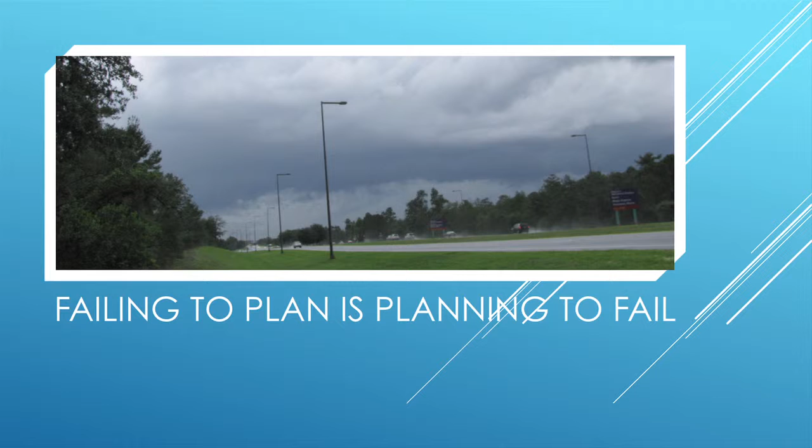I hope I give you some information that makes sense, but a lot of this is kind of intuitive, and I hope it makes sense for you. So remember this kind of phrase: failing to plan is planning to fail. If you hope it doesn't rain, if you don't want to worry about the rain, 9 times out of 10, nature is going to hit you upside the head with a big baseball bat full of rain.

So just some kind of things to drive home that point. Do it now, thank yourself later. Procrastination is like credit cards, a lot of fun until you get the bill. And the last one, a man who procrastinates in his choosing will inevitably have his choice made for him by circumstance. So if you don't plan for it, the weather will make that decision for you.

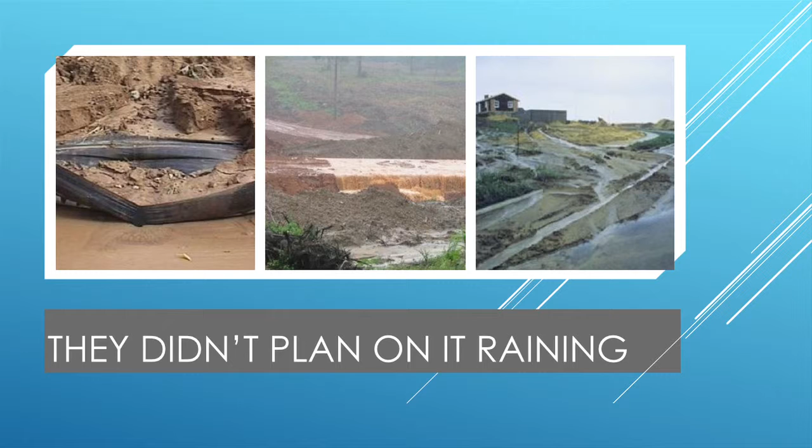These are some pictures of people who didn't think it was going to rain while they were out there doing their project. Well, of course it does. And they have control failures. They didn't think it would rain here. All across the country, we didn't think it would rain. In some instances, it can be pretty severe.

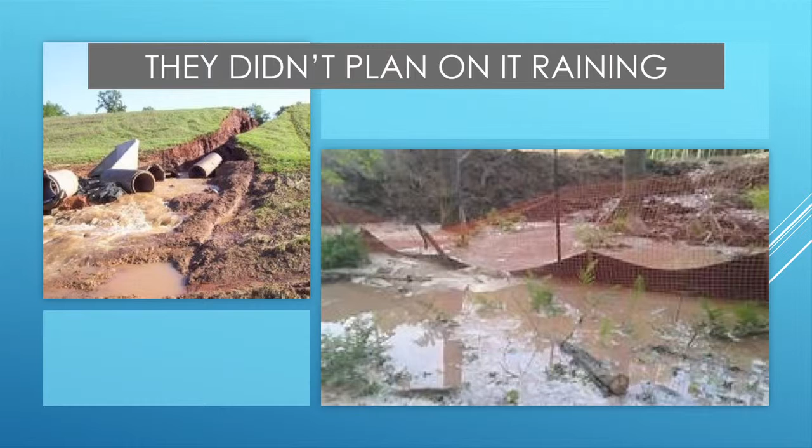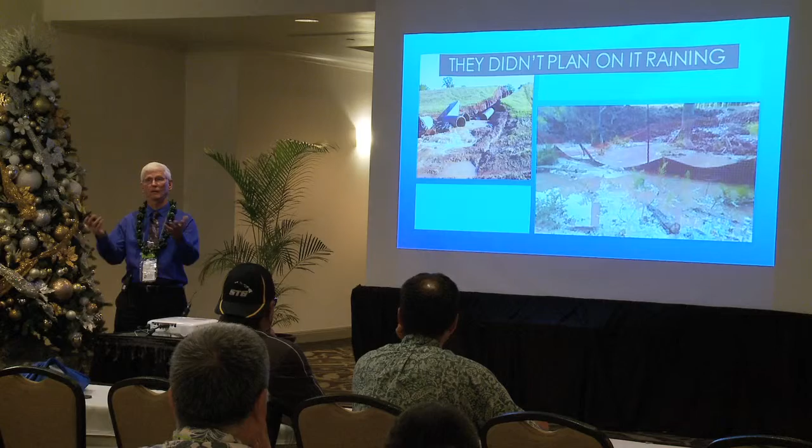We just installed our stormwater pipes, put them together, compacted them into the ground. It rained enough to cause them to separate and come back out. Now we're going to have some serious repairs. Basically, we get to do it again.

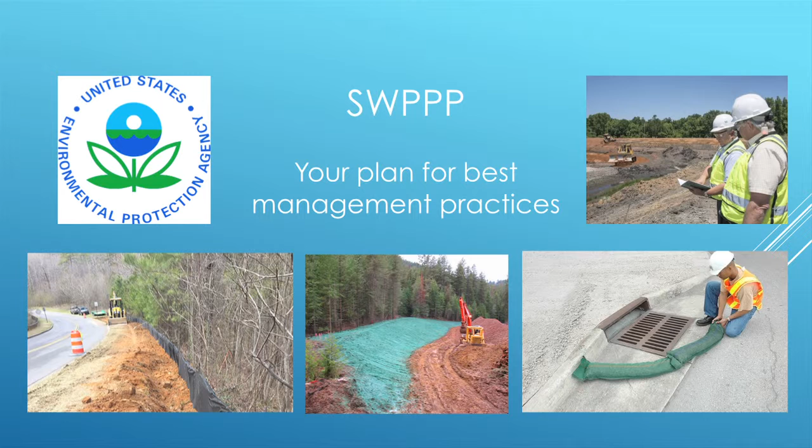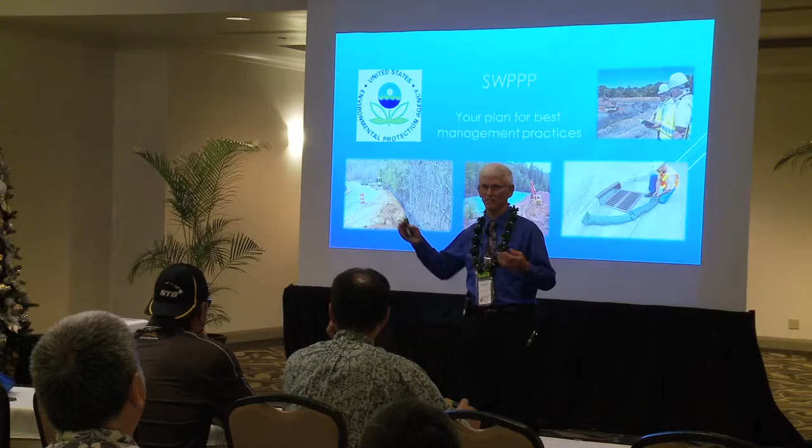Your stormwater pollution prevention plan is your best plan, your guide on how you're going to address this. Remember, a SWPPP is meant for you to make changes on. It's designed for you to make changes. When somebody applied for the permit for your SWPPP, they were guessing 3 months, 6 months, a year ago on what the weather would be. If they are accurate, let me have their name, because I'd like to make a lot of money on them predicting the weather. But they're usually not accurate.

Ideally, everybody would like to do most of their work when it's not raining. It's easier. Nothing's going to wash off, right? But now we're seeing unpredictable weather patterns. I'm from Florida. We're getting 2-inch, 4-inch, 6-inch, 8 inches of rain in one thunderstorm. That's more than you get in a month here. It's a lot. You're getting the same amount of rain you get per year, but you're getting it all at once. That's only going to continue to happen. So you better plan on it raining.

You should be able to survive what is a normal rainfall amount for your site. And I think I looked it up. A normal rainfall amount for Hawaii is less than a 1/4 inch of rain. However, if you have tropical storms and things blowing around, that can go up 10 times, 100 times more than that, especially if it sits out there and just funnels rain in on top of you. But you all should be able to survive a normal rain event.

When I was working at Disney and the Reedy Creek Improvement District, we couldn't do that initially back in the 80s. Sometimes we did, sometimes we didn't, but we had to learn to build things up. We had to learn that always on the low spot where the water flows, that's where we need most of our protection. You don't need it on top of the hill. You need it on the low spot. I don't need it necessarily next to where it might flow across a parking lot. I need it where it might flow into the wetlands or in the creek. That's what needs protection, or the water reservoir. Those are just things that make sense after a while.

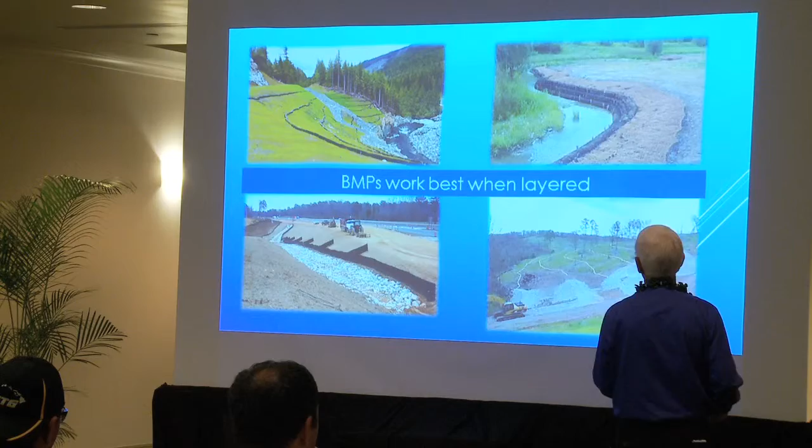Layers of BMPs work. Layers of BMPs. Having perimeter controls, having things that slow down the flow, having things that can divert water. These all work. Can't get over there.

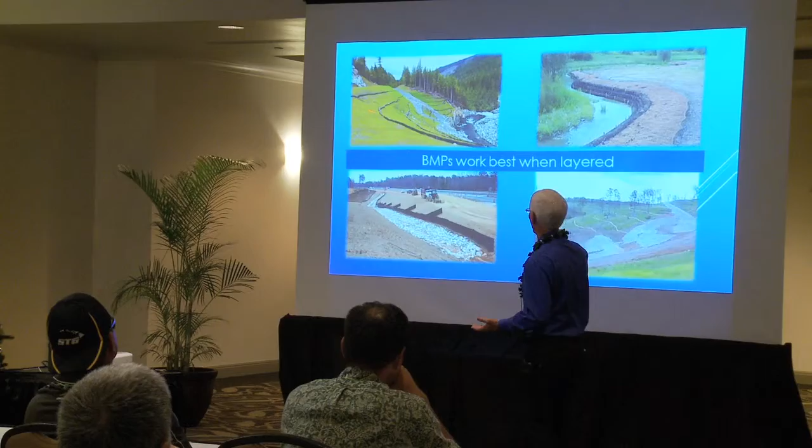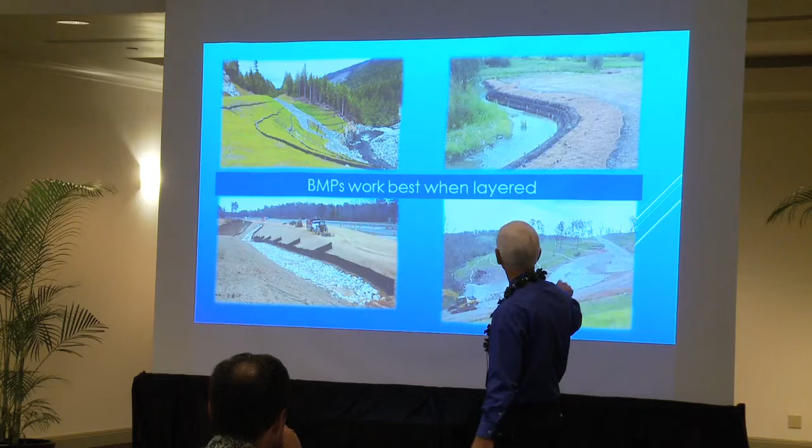You can see this on the hillside. They have their grass established. They have their channel beefed up before it goes down into the creek. Here they're trapping sediment as the flow's coming off of the road, going down into the beefed up channel. Same thing here. Here they beefed up the edge of the channel with some coconut.

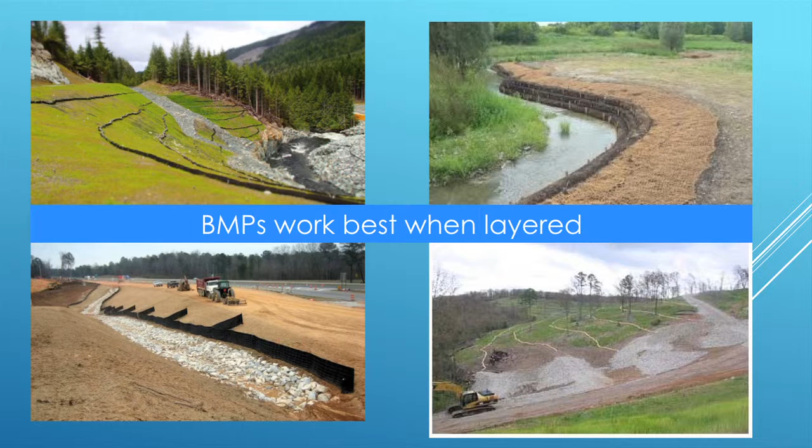All these different things. And this didn't happen overnight. They didn't just go out there and do that. It took them a while to learn to do this. Understand the difference between sediment controls and erosion controls. We always call everything erosion control, but there is actually a difference.

Sediment controls are measures we put in place while we're still pushing the soil around, while it can still flow off-site. They're the things we see a lot: the silt fences, the floating turbidity curtains, the inlet protection devices, and check dams. Those are sediment controls because water still has a chance to move the soil around.

These cost you money and time. You have to maintain them. You have to clean the sediment out. This is where all your effort is. Go look at your inspections. Silt fence failed, wattle failed, check dam had to be cleaned out, inlet protection failed. That's where you're spending your time and your money. That's where you want to make changes.

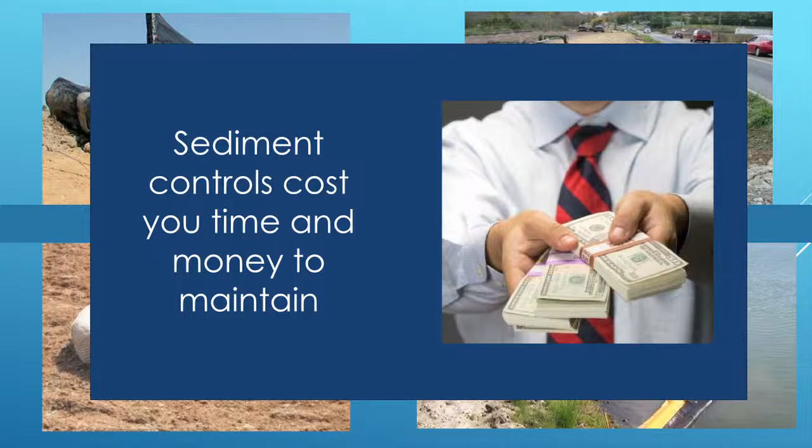So how do you get to that? Well, as quick as you can, you want to go from sediment control to erosion control. Erosion control is our permanent stabilization, usually some type of vegetation or a rolled erosion control product. Hydroseeding, hydromulching, those are excellent tools. Even the riprap we put down, sometimes with the rolled erosion control products.

We're done. You put that down right. Are you going to do any more maintenance on it? No, you're done. Unless something causes it to fail, you're done. So as fast as you can, you want to go from these controls to this control.

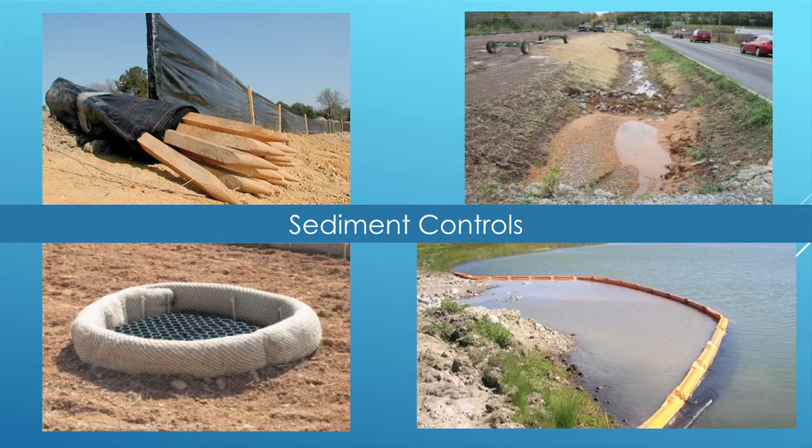Now, you can't do that overnight. This is kind of a silly question. How do you eat an elephant? One bite at a time, right? So how do you stabilize your site? One piece at a time. You get this graded, get your cover down. Get this graded, get your cover down.

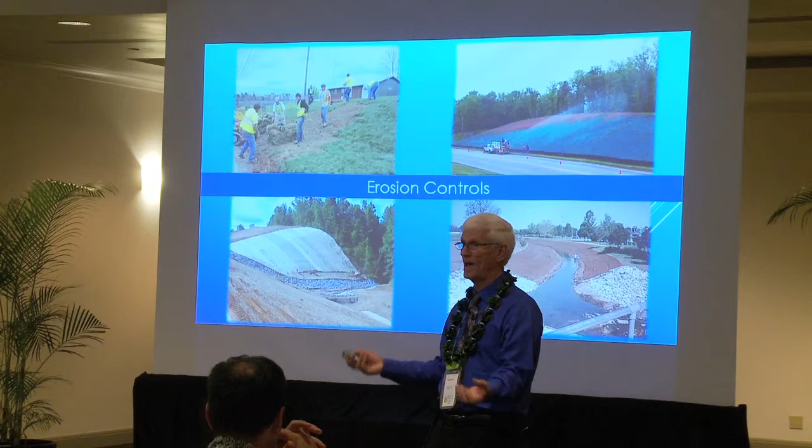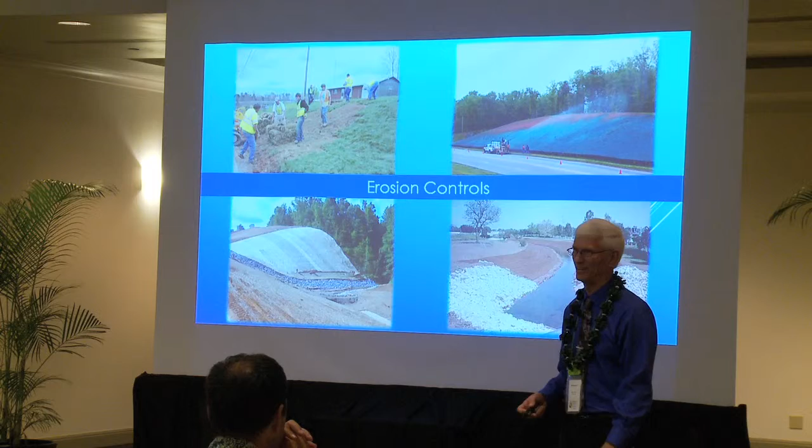Don't wait till the whole thing's graded and then put your vegetation down. You're asking for trouble. If you get it graded in sequences and phases, when the water comes off, it's clean water and you won't have as much to deal with. It took me a long time to figure that out. I had to learn it the hard way. Had a lot of failure. I am a failure when it comes to BMPs. I have failed on many BMPs before I had success.

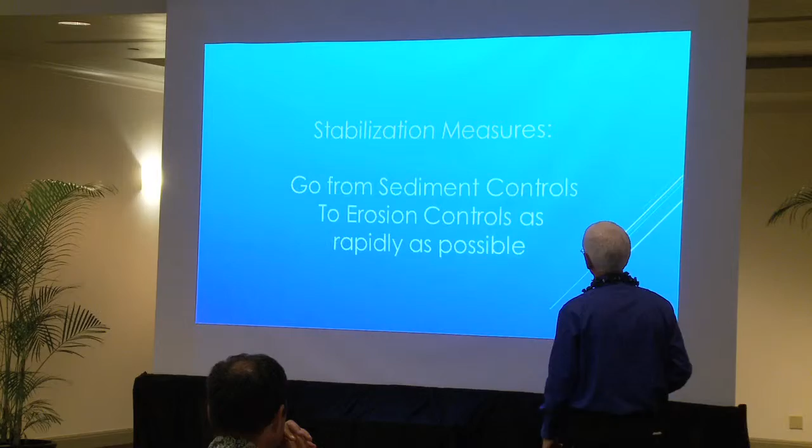How do you prepare? Let's say the forecast is for 3 or 4 days of rain. What can you do to get ready in a short amount of time? Well, you can't go stabilize the whole site in 3 or 4 days. You're out there on it. So what are some things you can do?

Well, again, in last-minute preparations, we want to know the accuracy of the weather forecast. Some weather forecasts, it's going to rain, and then nothing. Or it doesn't look like it's going to be much rain, and then the heavens open up. So get accurate weather. Walk on your site. See how it looks. Don't just look at the map, look at the SWPPP. Actually go out there and see what it is.

Most of the time there's a 5 to 7 day lag between what's actually happening on your site and what the documentation says. You have a week to get it caught up anyway. Know how water enters and leaves your site. That sounds basic as anything, but most people can't do that. Most people who are really good at designing CAD drawings couldn't go out to a site and tell you which way the water flows.

Now, at the beginning, the water starts out in one direction. At the end, it may go the opposite. And while we're in between, it's going off in all directions because you're regrading subbasin A and subbasin B, and different parts are going to different areas. That's when it's difficult to figure out where the water's going.

Reinforce any weaknesses in your fortress. If your controls are already run over by the equipment, or they're not installed right, or they look kind of flimsy, time to beef them up, right? A storm's coming. Beef it up. Have repair materials available. Silt fence doesn't go bad if it sits in your storage shed. You can use it on the next project.

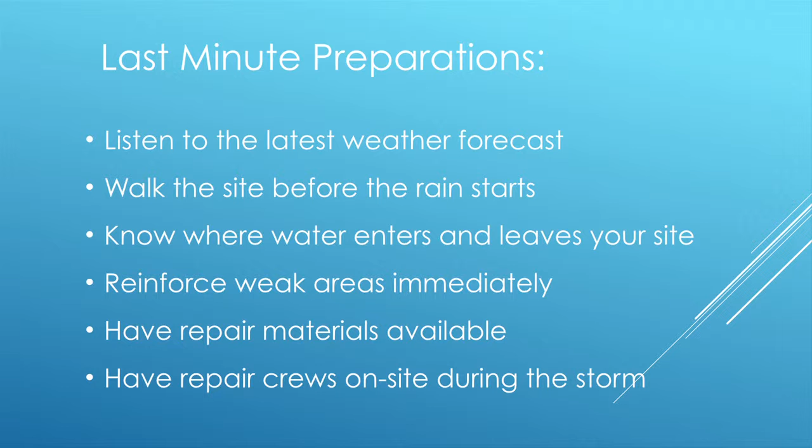They can do something. We can look at all of our areas that we look at, our perimeters, our inlets. What are we doing for slope stabilization, stockpiles, flow channels, other things we can look at. We can add an extra row of that perimeter. Like I said, beef up the low spot. Add another row of your perimeter control.

We can divert the water. We can put down our erosion blankets. Those are another thing to have on stock. Rolling those out real quick with a good crew, you can cover an area the size of this room in half an hour to an hour. That can help. That can be critical.

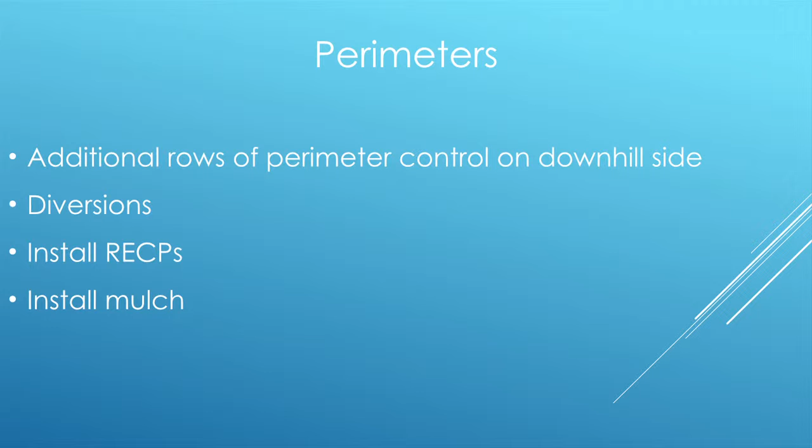Mulch. In Florida, after we have hurricanes, we have trees down everywhere. Well, we grind it all up into mulch. There's free mulch. If it's not going to float, mulch protects that bare soil from that raindrop. It'll get you through that rain event. If you have some of that, that could be useful. And again, just some pictures to illustrate what I'm saying.

There's a second row of silt fence. Here we've got our wattles. There's some diversion channels. They've added a row of erosion control blankets to their perimeter. Here they're blowing mulch. If you use a hay mulch or something like that, you want to make sure that you crimp it in. If you just blow it out on the surface, the wind will blow it down to the low spot or the rain will wash it down. You have to go in and take like a disc, just run over it. It'll push it in about an inch or two. That makes a difference as well.

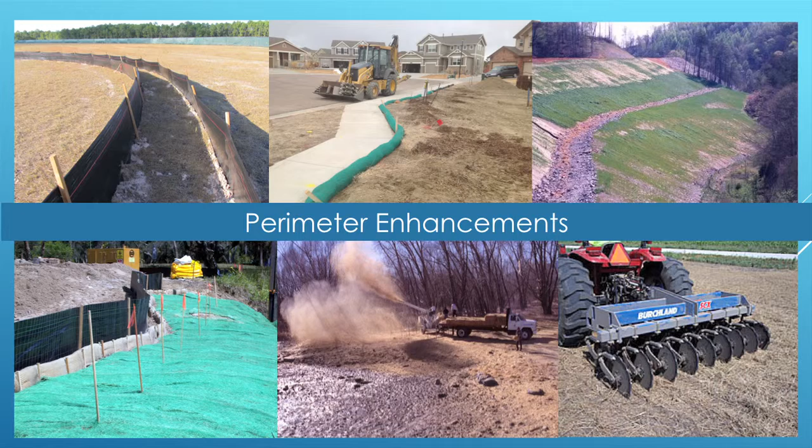Again, for our perimeters, just things we can do. We can interrupt the flow of water. We can stabilize upstream. Let's say if you know a hydromulch company, they can be your best friend just before the rain comes. Maybe you've got a 50-acre site. They can't stabilize all of it. They can start at your perimeters and start giving you some extra protection right around that. Within an hour, you can have your site beefed up. After the rain event, you can get back and regrade it and do whatever you have to do, but it can get you through that.

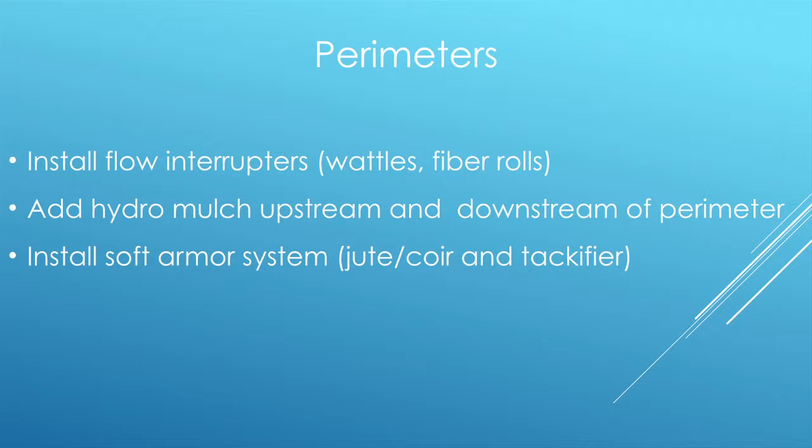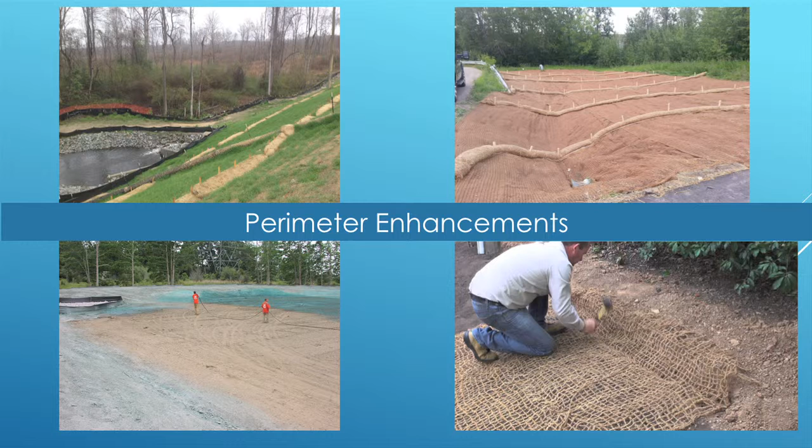If you have jute from a landscape company, pieces of jute can help you in some instances. Again, there's that going on there. They installed coconut fiber matting with wattles there. Here's a hydromulch company coming in and stabilizing around the area. Again, these are real quick. I pick up the phone, call Joe or Steve, and he's out there in an hour getting it going.

Inlets. Inlets are challenging. Inlets are where sometimes we can't do anything. There's so much flow coming through, or sometimes what we have doesn't work. Inlets have a lot more choices. When I started, your choice for inlet protection was rocks and silt fence. That was it. Now you have engineered solutions. Now you have types of wattle materials or mulch socks, things like that.

Always make sure that the inlet has the ability to let the water overflow. If the inlet protection device sucks up to the curb, it will cause flooding. Even if you have that, you can fix that though. I'll show you that. You can add a little extra control around it, and again, too much water, send some of it in another direction.

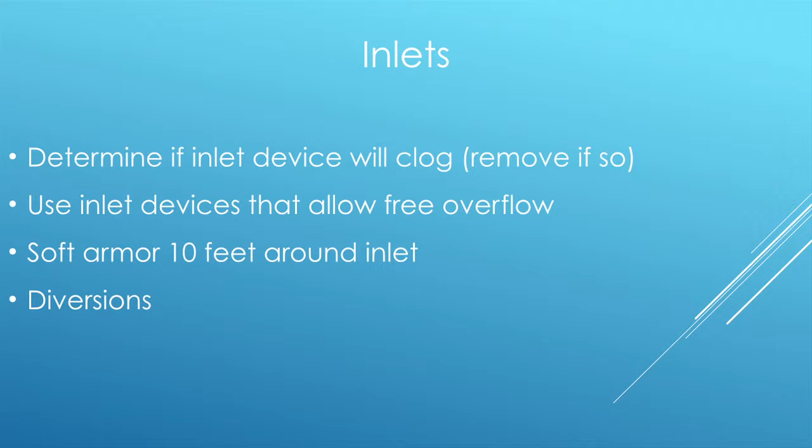This is in Florida. A lot of times people like to use these drain field pipes. Let me see if I can get over here again. Problem with this is you'll see this goes right up in the curb inlet, and if you have a rain event, it will suction right up into it, and it'll cause flooding. So to fix that, what you can do is pull it out a little bit and put a sandbag in between it or half a concrete block that will allow overflow.

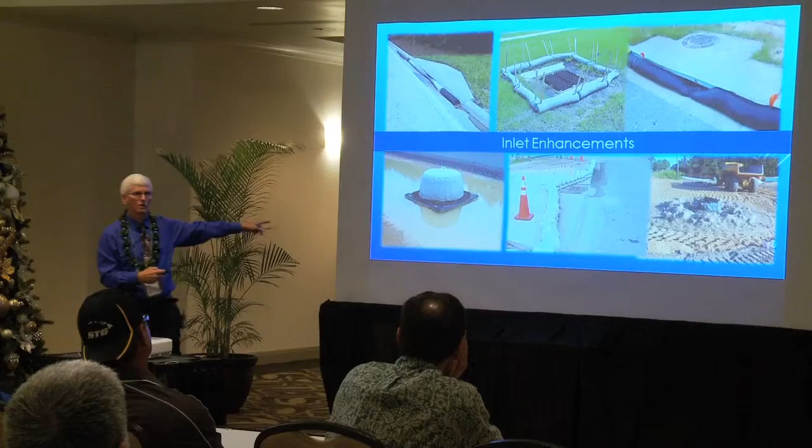This is geohay, artificial hay bale. This allows overflow coming into the inlet. This is recycled tires in a geotextile called a gutter eel. But notice it has a pinched waist, so it allows overflow. This is a product called Silt Saver. It's a high-density polyethylene skeleton with a bag over it. It allows the water to flow through the sides, and it has an overflow port.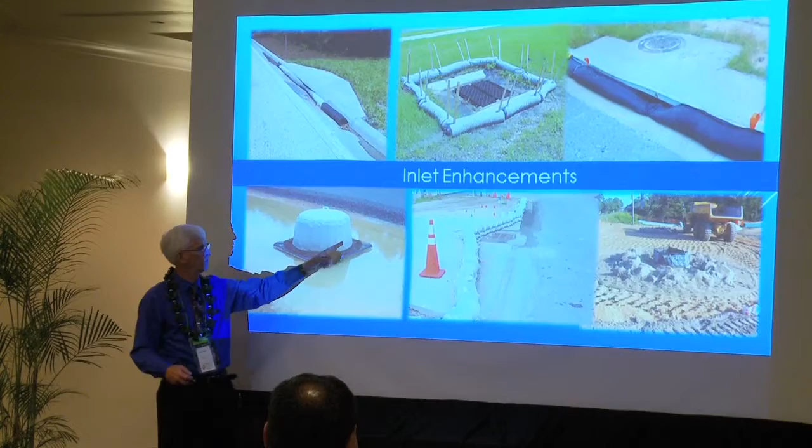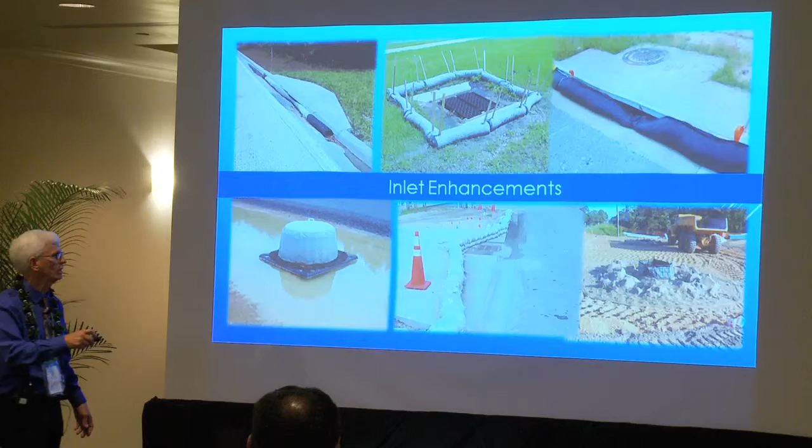Here somebody's used rock bags to allow water to get to the inlet and not go to their site. And here they've beefed it up with a little bit of jute around a silt fence inlet protection device. But again, don't have anything that suctions up to the inlet. That will cause flooding. This is good for overflow. That's good for overflow. You want overflow. If you can't get overflow, you'll have to pull your protections. It'll cause flooding. We can't have flooding, right? We can't have flooding.

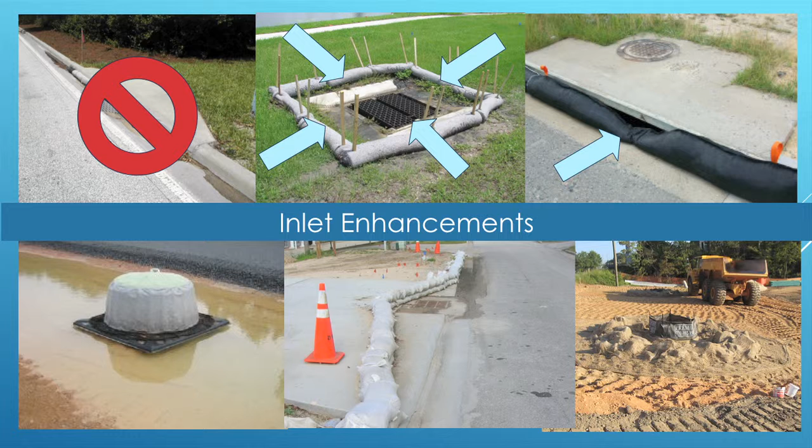On slopes, we have different choices. We can protect the slope both temporarily and permanently with hydromulch. We can do our erosion blankets. RECPs is just the technical term for rolled erosion control products. You've seen erosion blankets. Jute again. And again, we can divert the water, get it flowing different directions.

Again, I like hydromulch. Hydromulch is instant. I used it one time to stabilize around a pond, very steep slope. An hour later, it rained 2 inches, and I thought, oh, there goes all my money washing into the lake, right? It didn't move. I was impressed. So once this is properly applied and gets out there, it'll survive quite a bit of rain and keep you from having to chase mud.

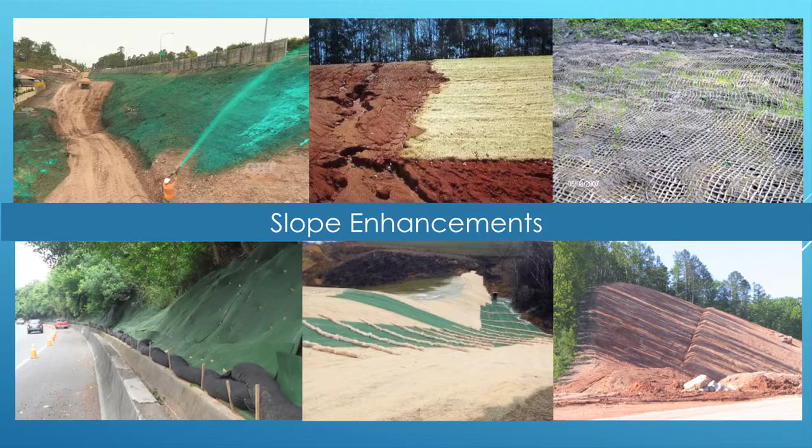You don't want to be chasing mud. That's a waste of your time. Not even counting any violations or rules or anything. You'll have to go get some more soil to put back on the slope. It's a waste of your time to go do that.

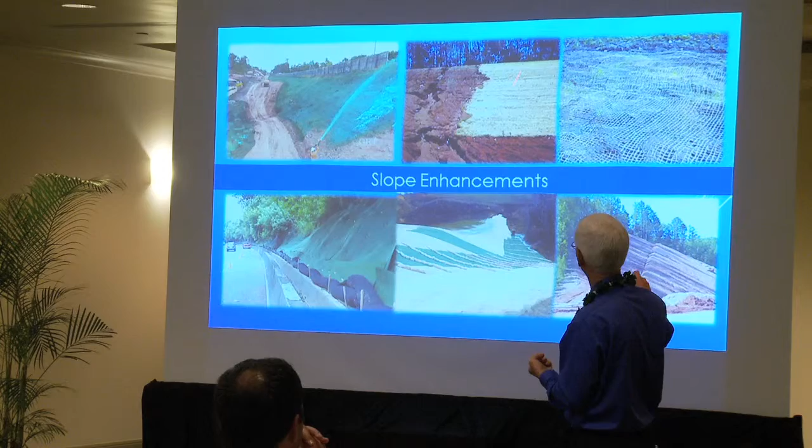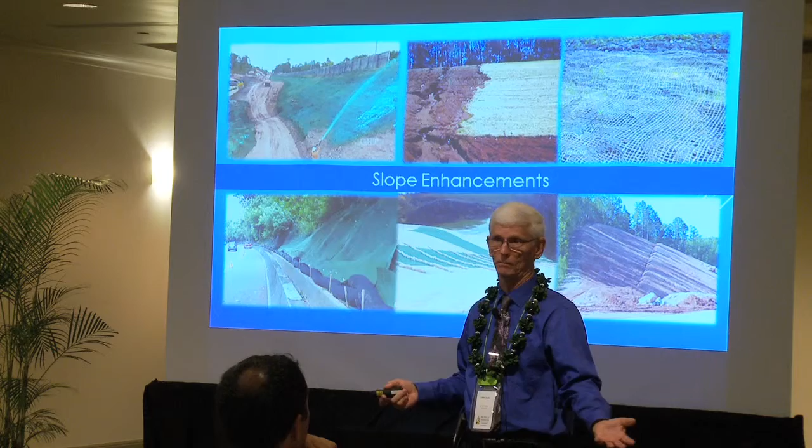Here's a good example of a rolled erosion control product. Protected, unprotected. You can see unprotected, we're down to gully erosion. That's all washing off. Somebody's going to have to bring that back up and regrade it. Here you can see some of the grass starting to grow up through the jute. That's a good thing. This is actually in Hawaii. I believe it was a project done recently along one of your highways.

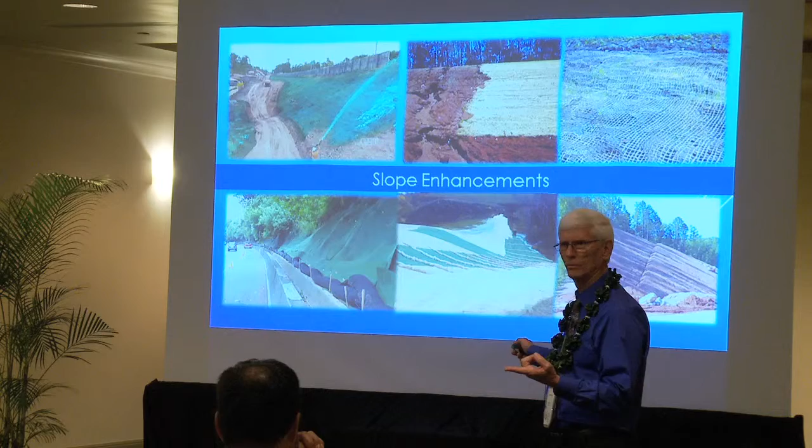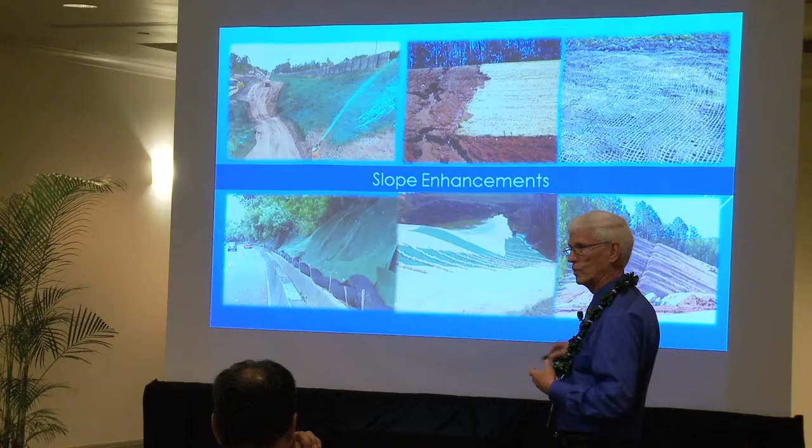Here's a very steep slope with erosion blankets and wattles acting as check dams. Here's a diversion so that the water doesn't get a full run off the slope. Hopefully most of this is review. It's not anything new. You've seen this. It's just a matter of putting it together and making change, being willing to take a chance and make changes.

Soil stockpiles. I saw some good examples in some of the pictures before we started this morning. Again, you can hydromulch them, you can put blankets, you can soft armor them, perimeters, you can cover it with a tarp if it's not too big. Okay? Or you can make it go away for the rain event. If it's small enough, take it away.

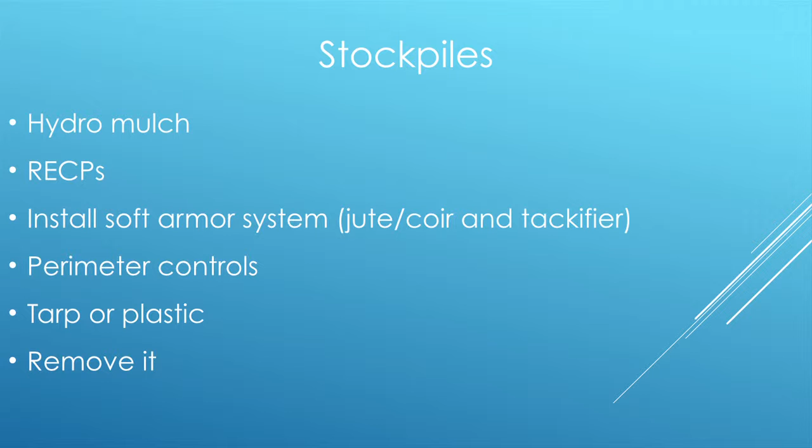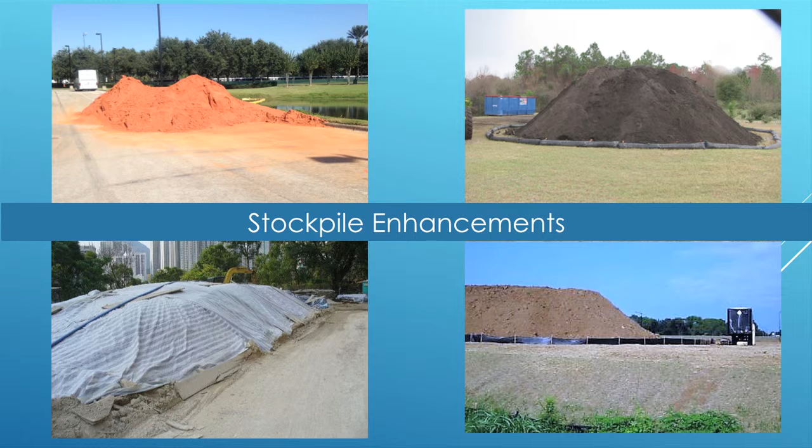Unprotected soil stockpile next to an inlet, we don't want that. You know where that's going to end up, in the water there. Here it's protected with those gutter eels. Those things weigh 84 pounds apiece. They're not going anywhere. Okay? Here they've got it covered with some plastic, and here they've perimetered it with some silt fence.

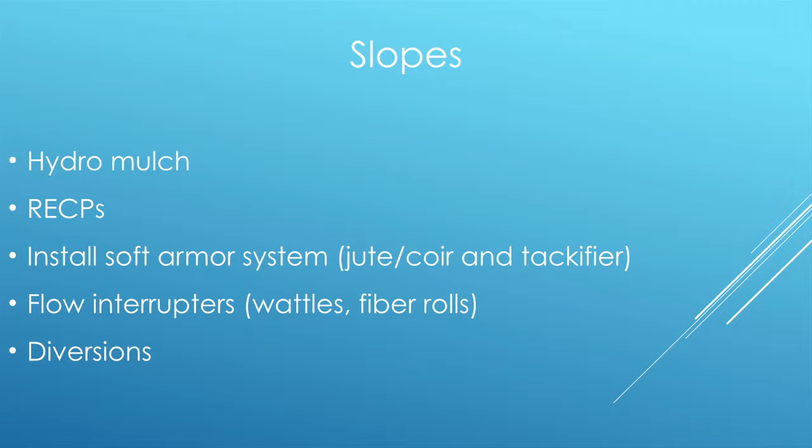Slopes, we're going to talk about all these as slopes. Again, we're going to be hydromulching, doing the same thing. Let's talk about a material that I used and we use in Florida, but it's not common here, that you all should look into and get approvals. There's a material called anionic polyacrylamide, or PAM. There's several types of PAM. You always want to use the anionic PAM.

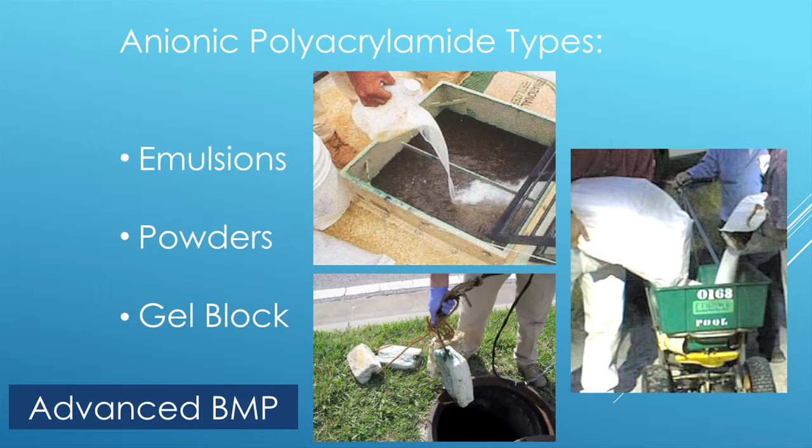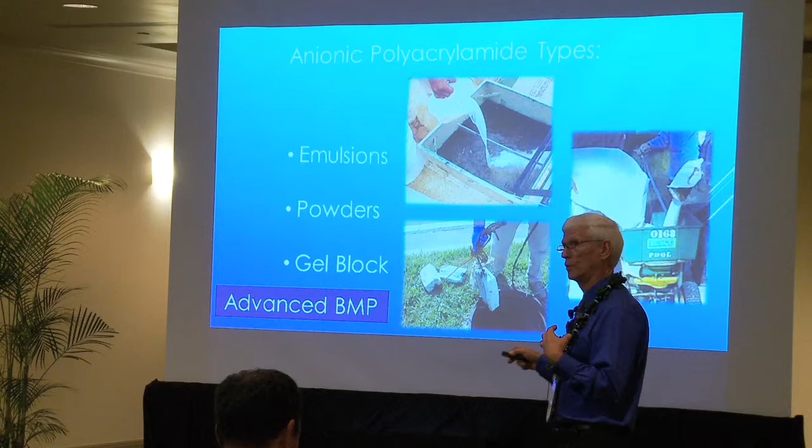Anionic PAM, or A-PAM, has been approved by the US EPA for use in treatment on construction sites. It's in the 2017 Construction General Permit. It's also the same material used in drinking water, so it's very, very safe to use. It comes as a concentrated emulsion that you can put in a water tanker. You can use it for dust control. You can use it to spray on a slope.

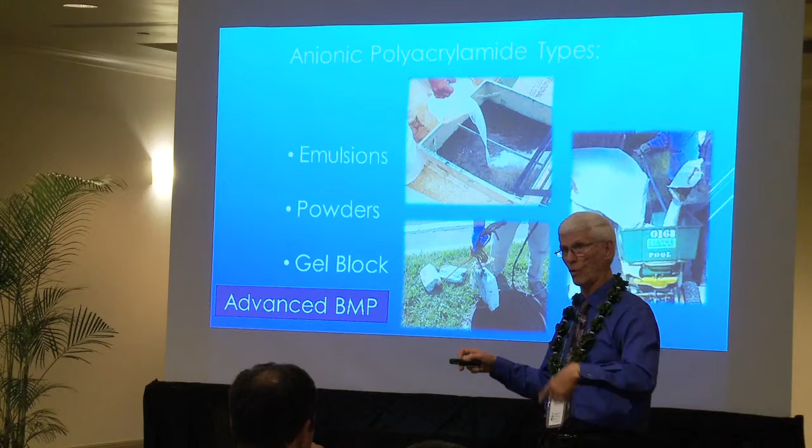It comes as a granular powder you can use to stabilize slopes and again for dust control, and a gel block that dissolves in water and keeps the water clean. It's been approved by EPA. I've got copies of this EPA document if anybody wants them, and it's in your 2017 CGP.

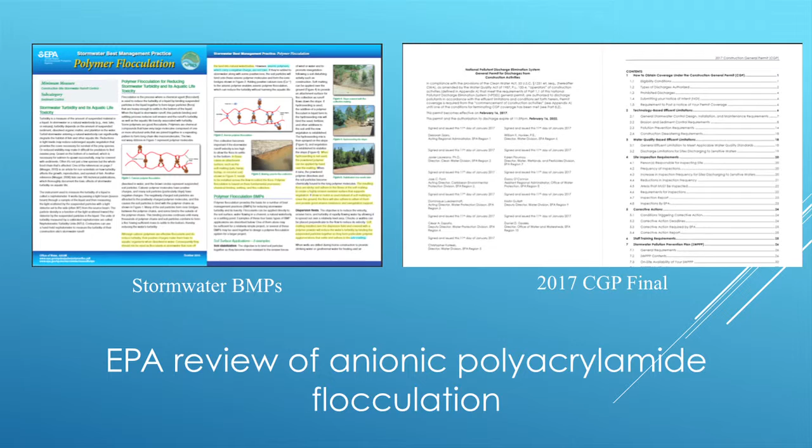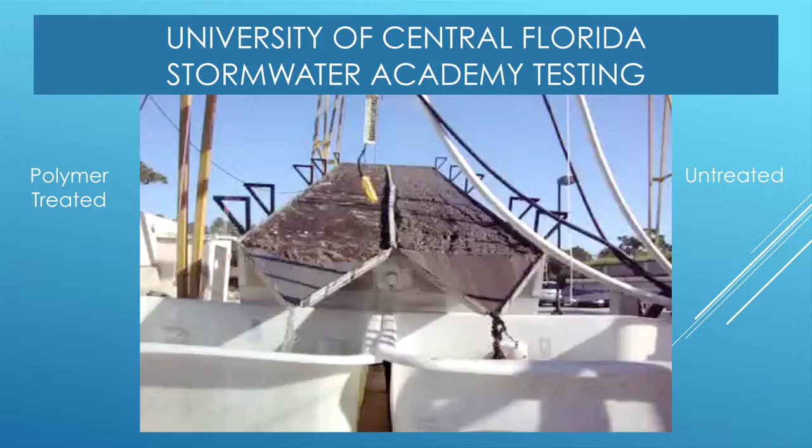This is a test of a rain simulator by the University of Central Florida. It has the largest rainfall simulator in the world. On the right is an unprotected slope. On the left is a slope with jute and polymer.

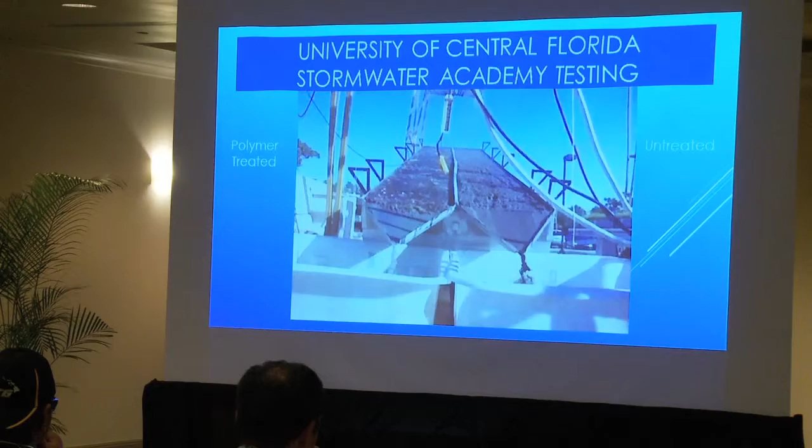Anyway, sorry about the noise part there. But what you can see is without polymer, and that was an 8-inch rain event on about a 1.5 to 1 slope, very steep slope, which we have in Florida when we're building our roads next to our coastal areas. An 8-inch rain event is now not uncommon. That used to be a 50-year storm event. That's now almost a 5 or 10-year storm event in Florida. So we're seeing more and more. Unprotected slopes wash away. Protected slopes stay in place.

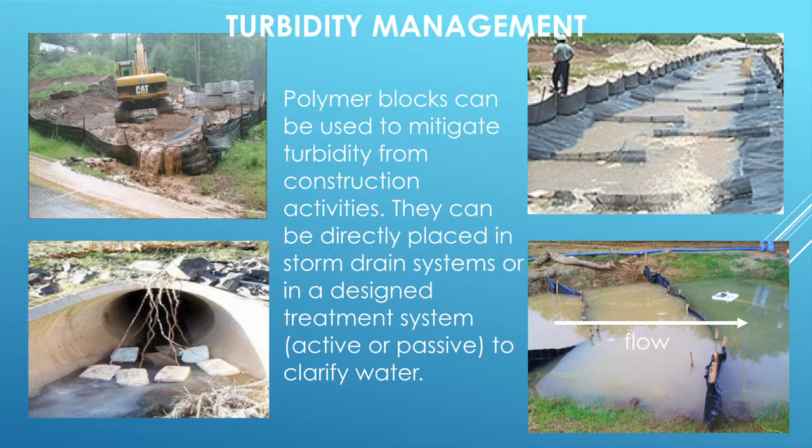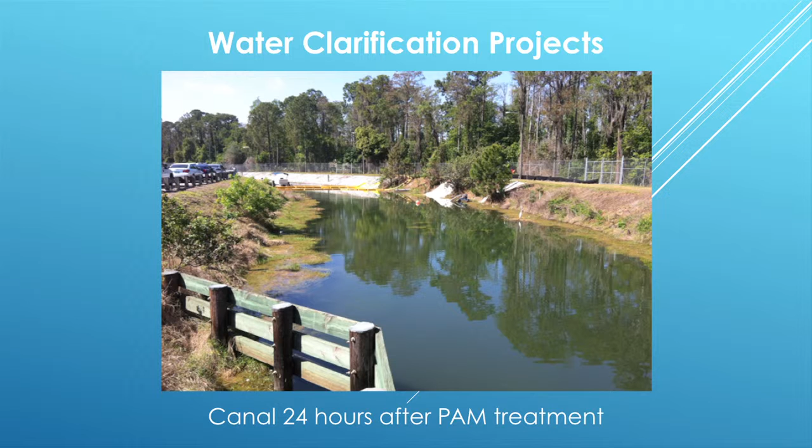The polymer blocks can be used in a passive system in storm drains where they're treating the storm water before it goes off into a retention basin, or they can be designed as a larger treatment system. They basically cause the clay particles to clump together and behave like sand. They drop out by gravity. This is a canal that was muddied up, and this is the canal 24 hours later after one of those polymer blocks was passed over through a pump.

All right, what if the rain's about to hit, I've got no extra supplies, I got no money to buy anything, I've got to be creative, right? Y'all know the term MacGyver, we got to MacGyver something. Somebody's got to build something in place of something that normally is a tool that I don't have. So there's a couple of different things you can do.

One of those, you can make a diversion from the blue lay flat hose. If you take the blue lay flat hose, which is often used in mud hogs, and tie off one end and pump it up with water, it makes about a 4-inch, very heavy diversion. You can temporarily use that along an edge that you didn't have any way to divert the water or you didn't have any ability to install it. You can protect the slope that way, redirect the water. You do want to weight it down with some sandbags or concrete blocks about every 10 feet.

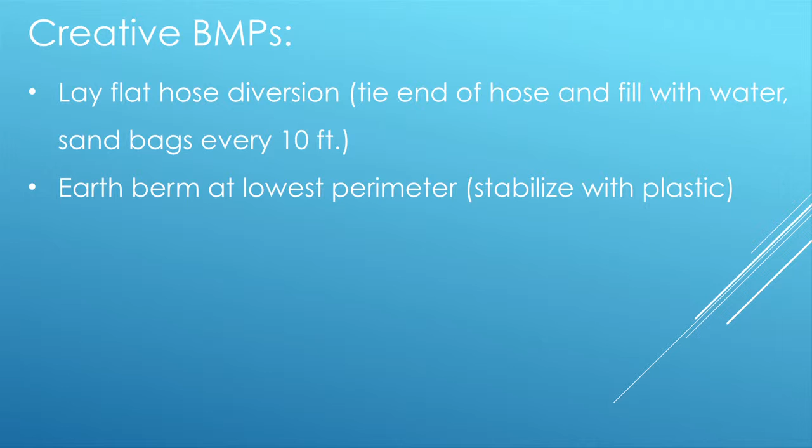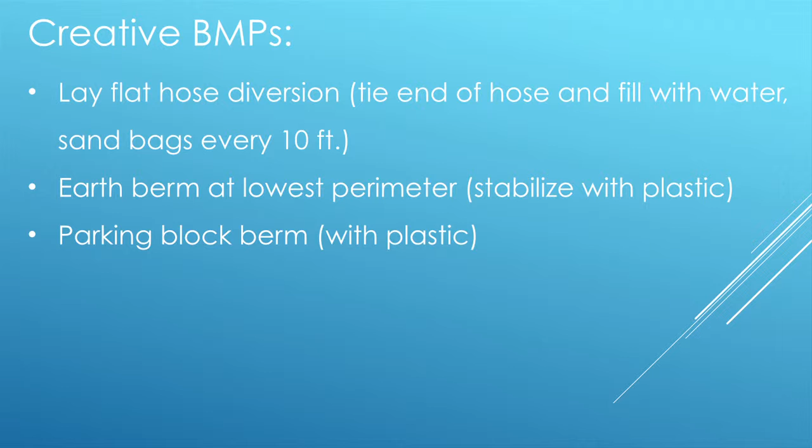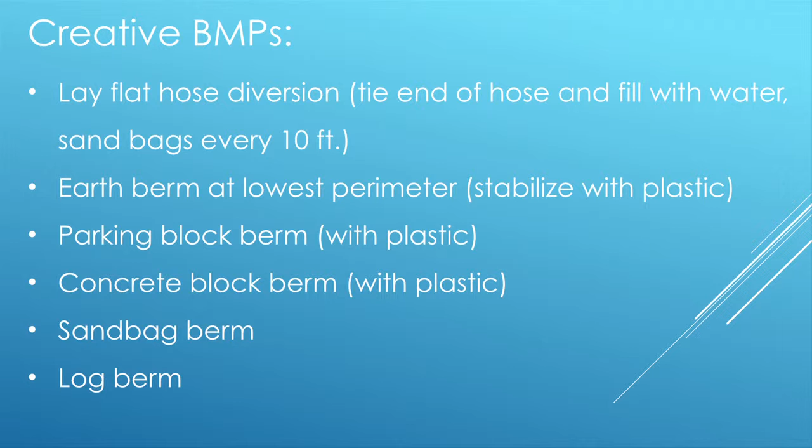You can go down to the low spot on your perimeter and build you about a 2-foot high earth berm and stabilize that with whatever you've got, plastic, tarps, something. That will help slow the water down so it doesn't blow out your perimeter. You can use parking barricades that might be going in a parking lot, set those up. Again, you're just trying to create a little kind of a check dam holding area. So you can create these with parking blocks, concrete blocks, sandbags, and I've even seen them made out of logs, if you had a bunch of trees near you that had to be taken out. You can add this to your perimeter at the low spot to help get you through the rain event.

Now, I wasn't planning on talking about hurricanes, but Marlena wanted me to throw this in here. I am by no means a hurricane expert, but a lot of what we're talking about, again, is just things that are already in a plan that you're going to follow that make sense. So I'm going to review that. So, you should have a written plan. I'm assuming DOT in Hawaii has a written hurricane plan, some version or other. At Disney we had one. It was this massive 700-page document. By the time you read the plan, the hurricane had come and gone. So eventually we had to get it to something that made sense.

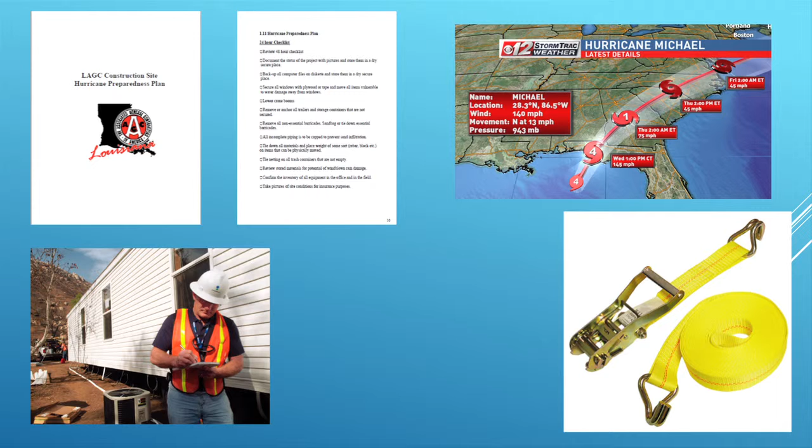Again, check the weather. Work with building departments, especially if you're near structures. They want to make sure certain pieces of equipment, certain cranes are not going to damage an existing building if you're going through an urban area. Secure your job site materials. So again, these are all things that make sense. The nice thing about plans is they usually have things to do 72 hours out, 48 hours out, 24 hours out. They all have a nice checklist. We want to make sure all these things are taken care of. Lower cranes, secure these things. Make sure people review this. Make sure people don't go, well, what are we going to do? We're going to follow the plan, right? This isn't new. Somebody else has already thought this up.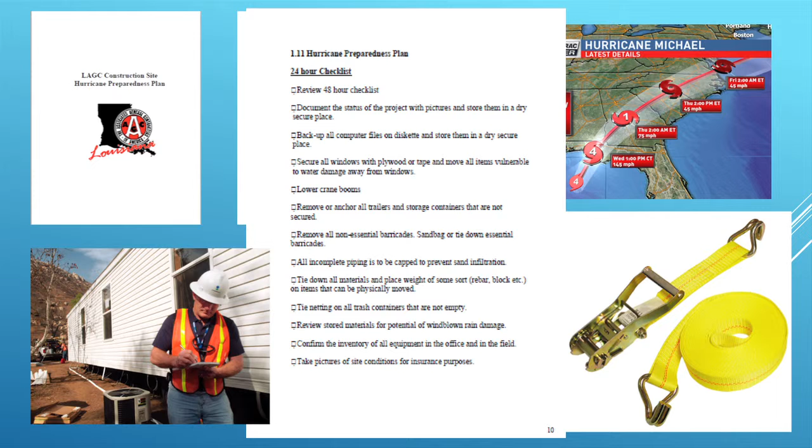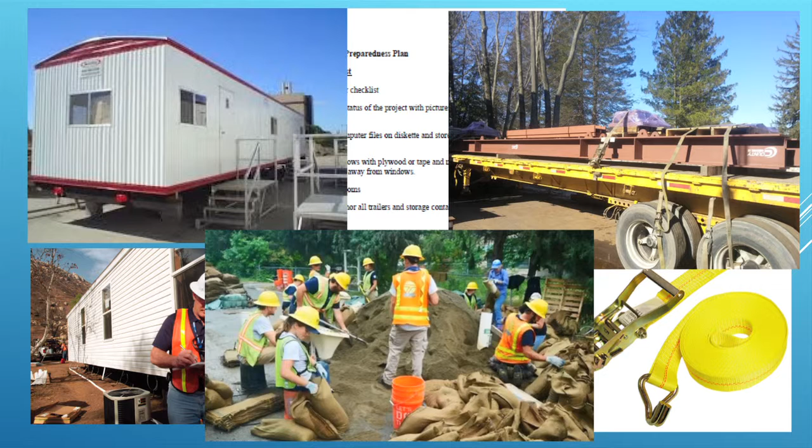We're going to secure our construction trailers. We're going to tie down equipment. We're going to get people to assist in making some sandbags, some rock bags if we need those. We're going to plan that our site's going to flood down the low spot. That just makes sense. Water's going to accumulate in the low spot. Hopefully that's not the major part of the road, but that is going to happen. So we're going to need pumps. We're going to need the ability to get that water out of there. If we've got any hazardous chemicals, we're going to make sure those are stored. We're going to secure things.

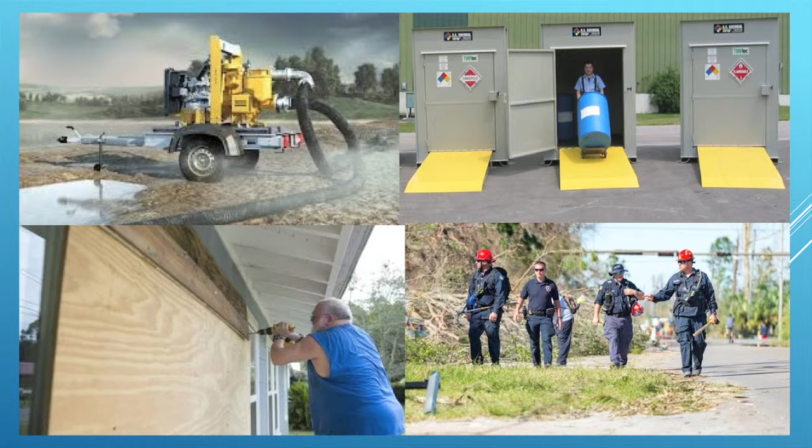After the storm, we want to let the first responders go through and make sure it's safe. We don't want anybody stepping on power lines or anything dangerous going on with our employees. So again, just some pictures that go along with that. Ready to pump the water, secure those chemicals, board up our construction sites. Marine storage containers are really good for this, etc. And again, let the first responders do their job. All right.

I can show you pictures of our most recent bad hurricane, because you guys had it coming at you. I didn't think I was going to be able to come here. I said, oh my gosh, I finally get to go to Hawaii, and a Category 5 storm is barreling down. Unfortunately, it hit the Big Island and caused damage. Our version of that was Hurricane Michael.

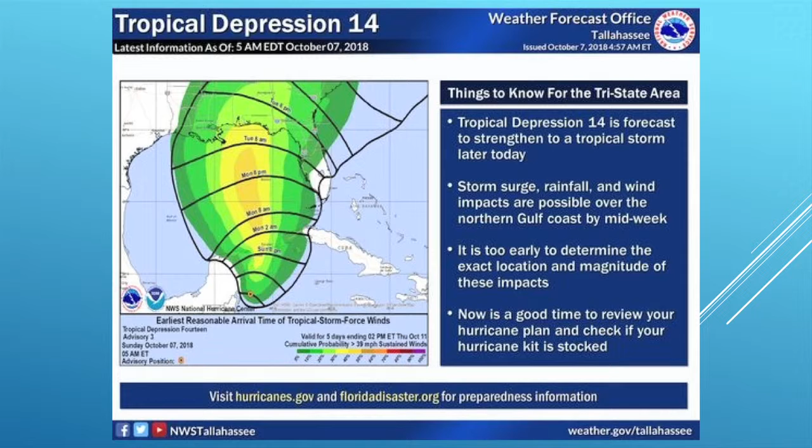Hurricane Michael started out as a tropical depression down here in the Caribbean. Florida's over here. No big deal. We get these all the time, so people kind of don't pay attention to it. A day or two later, they're talking, we think it's going to go through up here, and we think it's going to be a Category 2 or maybe a 3 hurricane. Floridians don't bat an eye. They're like, okay, that's no big deal.

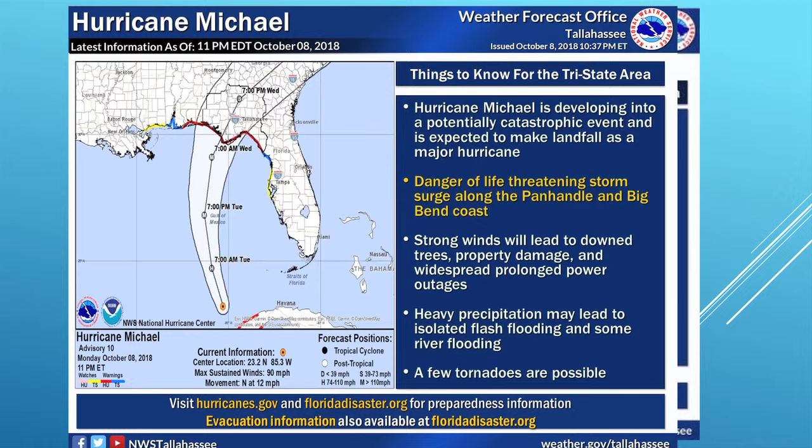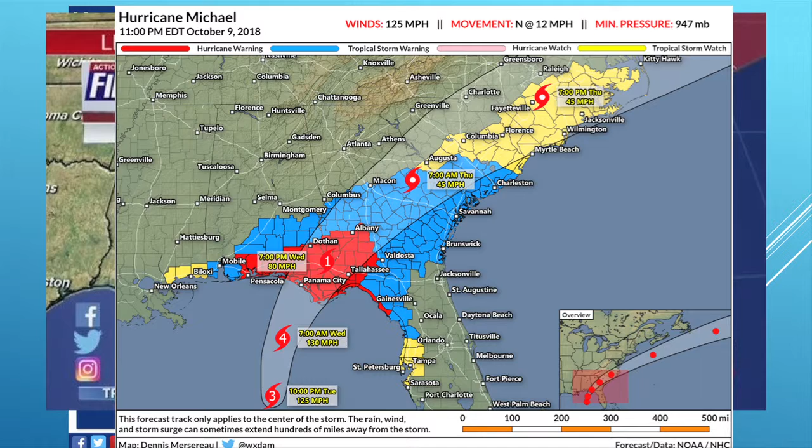Day later, they're going, oh my gosh, this is going to be bad. It's coming in good, 120-mile-an-hour winds. Day after that, they said, this is going to be a Category 4. Category 4 is bad. You need to evacuate. And by the time it actually got there, it was 1 mile an hour short of being a Category 5.

1 mile an hour. Now, I work in a lab. I know categories and how well things work. 1 mile an hour is probably enough of a variance that they really ought to go back and look at the damage. They'll probably call that a Category 5 storm. It's definitely a Category 4++.

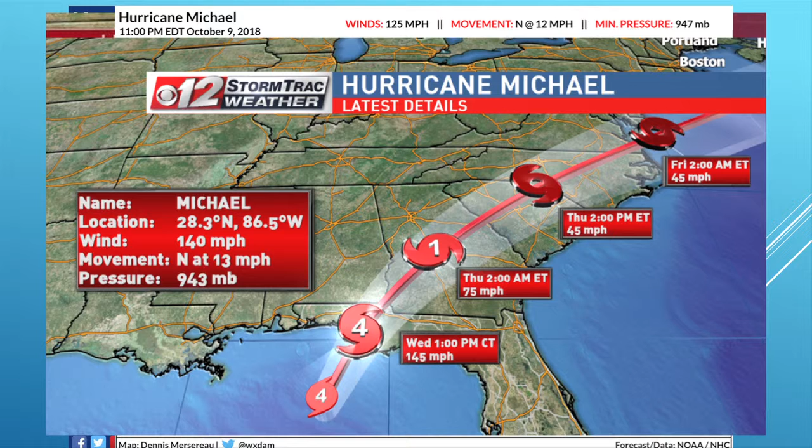Now, a lot of people didn't get out of the way of the storm. People go, oh, they deserved that. That's not true. This thing went from a Category 1 hurricane to almost a Category 5 hurricane in 72 hours. If you tell people right now that they're living on the beach and they have to evacuate, they're not going to get up and go. They're going to talk about it, think about it, process it.

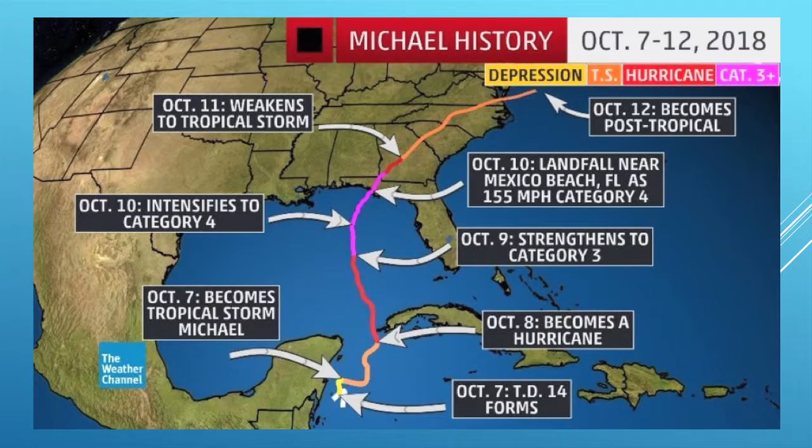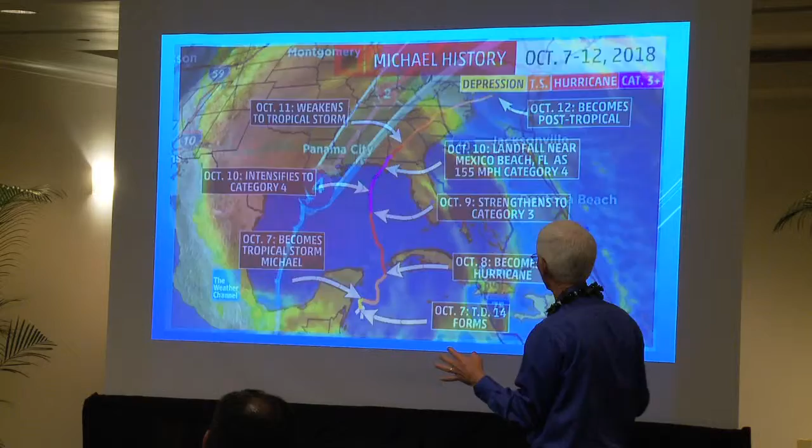Same with these people. They're hit by hurricanes all the time. They're being told they're going to get hit with almost a Category 5 hurricane, and if you don't leave, you're going to die. And they're like, we've been through this before. They had never been through this, ever. By the time it got upon them, it's too late to leave. Too late to leave. And look how big this storm is.

There's a Category 4, 156 miles an hour. At 157, it's a Category 5. Every wind gauge that measured the hurricane flew apart. It disintegrated. It got up to 129 miles an hour and it disintegrated. So they don't really know what the wind was.

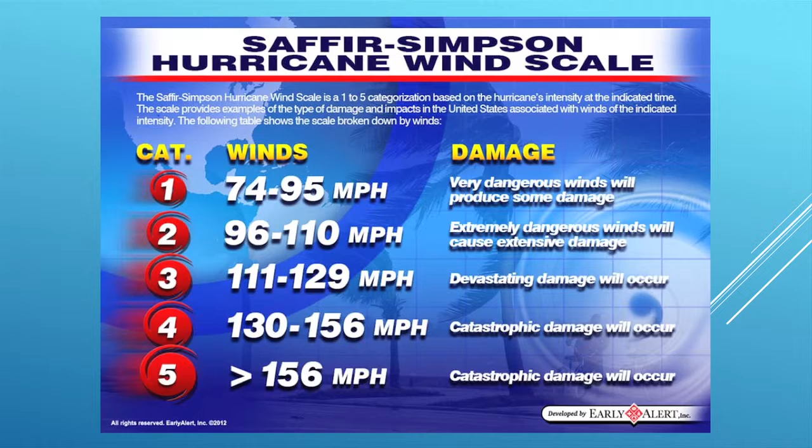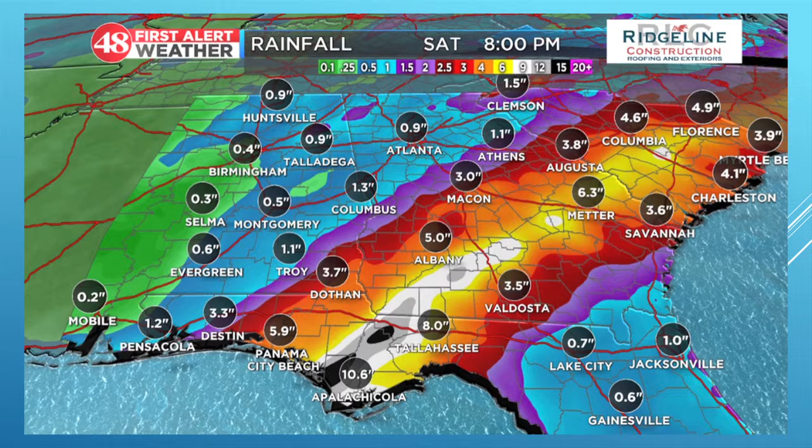And look at the rain. This is rain. Look how far the rain's affected here. This is in 24 hours. 10 inches, 8 inches, 3 inches, all the way up the East Coast. Hurricanes cause a massive impact. And you see in the pictures, this could be anywhere, but this is really, really bad.

And subsequently the damage. We saw those. Homes destroyed. Trees down. Protected areas lost their roofs. Storm surge wiped everything out. First 1,000, 1,500 feet, gone. More pictures. Solid structures almost destroyed. Trees snapped.

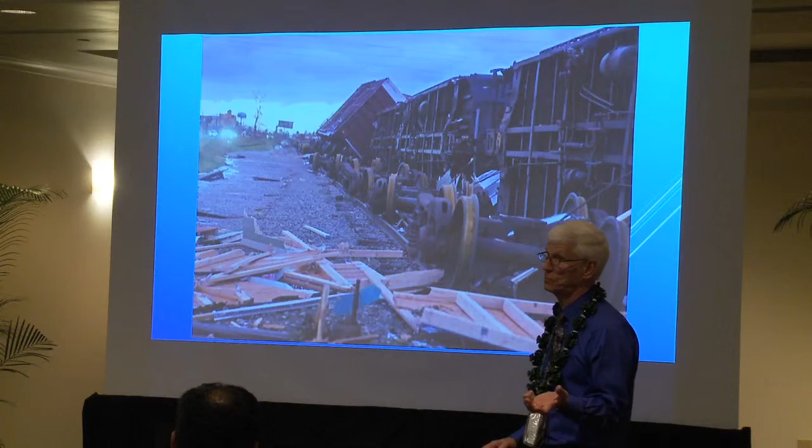Train cars blown off their tracks. An empty train car weighs 60,000 pounds. What kind of force does it take to push it off the tracks? I don't know. That's pretty strong. Recovery is going to be very slow. The roads are damaged. The utilities infrastructure is gone. But they're making repairs on it. They're working on it. It's going to be a slow recovery.

Satellite photos showed almost everything there on the beach area in Mexico Beach wiped out, with the exception of this one home. This one home closest to the beach appeared to have almost no damage. Why? Because the owner built above code. Instead of having 30-foot long pilings, he had 40-foot.

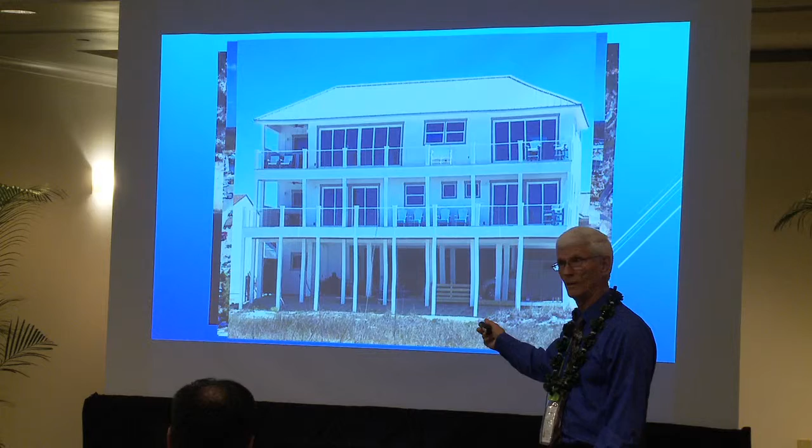Instead of having a roof that could be lifted off, he insisted that he didn't have eaves and everything the wind could get up. He had double-layered windows rated at 140 miles an hour. This is the new building code if you're going to live in coastal Florida. You're going to have to build to this. It cost him an extra 20%. But look what it survived. The guy rode it out and said he'll never do it again. Right? Even the Air Force Base was ripped to shreds.

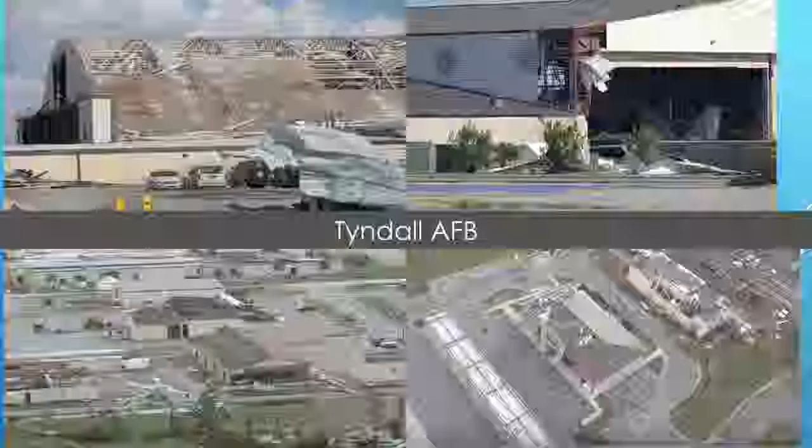Ripped to shreds. So, in summary, have a plan. Pay attention to weather reports. Have your materials on site so you can do what you've got to do. Evaluate and adjust the plan. People look at plans and they never change them.

After every storm event, you should go back and say what worked, what didn't work. If it worked, do more of it. If it didn't work, figure out why. If it didn't work because it's just the wrong way to go, change that. You have to make changes to these plans. Work the plan.

Everybody should be trained in it. They shouldn't go, what are we going to do? We're going to do what we just trained you on and follow it along. None of this is rocket science. These are all things that everybody does. But you have to get out there and do more of it. You have to be involved.